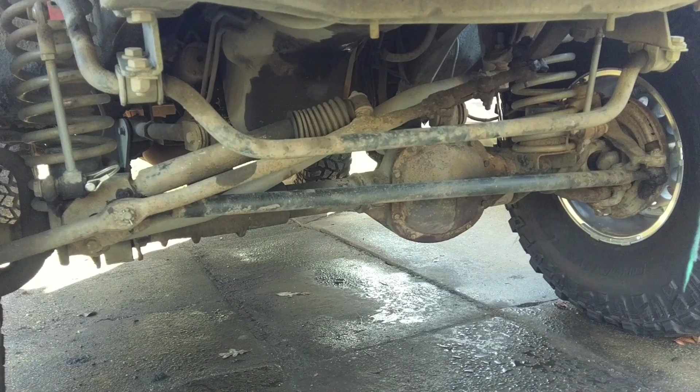So, today's topic is going to be steering. So as of right now, I got a Rough Country heavy-duty tie rod, and that's about it. Everything else is stock. And it does okay. I've been trying to grease it every month or so just to try to get the crap out of it after big trips and stuff like that. But she's still feeling a little loosey-goosey.

So, I've got some big plans for the steering, but for now, I'm going to upgrade the steering to something a little tougher. So first off, let's have ourselves a little steering lesson for heavy-duty steering and stuff like that. So real quick, we'll go over the components. Up here, this arm, this is your pitman arm that comes off your steering box, which is up there. Your steering box is connected to your steering wheel that does the left and right things.

Off the pitman arm is called your drag link. So what that does is that connects to either one of the wheels or your tie rod. So your tie rod is here. Your tie rod ties your tie rod ends together. So your drag link and your tie rod move your wheels. The way that they connect to your knuckles is what kind of steering it is.

So this steering right here is what's called, I believe, an inverted Y, or just Y steering. And what that means is our drag link goes from the pitman arm to our passenger knuckle, and then our tie rod connects to the middle of the drag link and the driver knuckle.

A lot of people, you'll see, they do a 1-ton steering upgrade. That is an inverted T setup. So what happens is the tie rod goes from the driver knuckle to the passenger knuckle. So it's one bar connecting both tires, and then your drag link connects just to the center of the tie rod. When you do this with tie rod ends, you get something called tie rod roll.

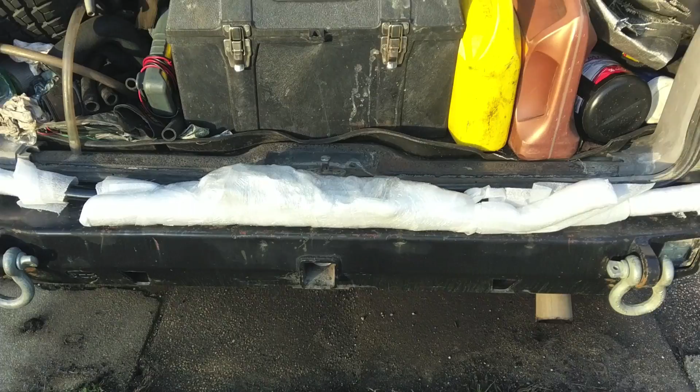Alright, so here it is. Iron Rock Off-Road over the knuckle steering kit. I went with the 1/2 inch version because I don't feel like drilling out my knuckles, because I like to have the ability to go back to old setups if need be. So this is what it comes with. You get yourself a nice beefy tie rod, nice beefy drag link, all your Heims and hardware, and some instructions.

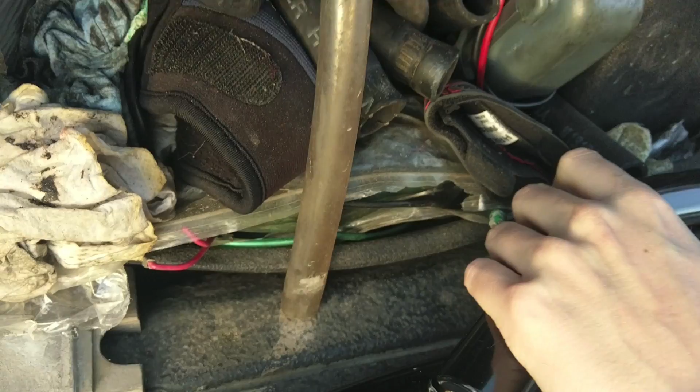All right, take a look at that beauty. So you notice we got some bends in here. I'm assuming that is to help us clear everything, so that's really cool. And the drag link's got a couple bends here and there. And these are split design, it looks like. Or at least that one is, so there must be a clamp that tightens that one down. It's probably for the adjuster. So here's our adjuster. And this will allow you to make sure that your steering wheel is straight.

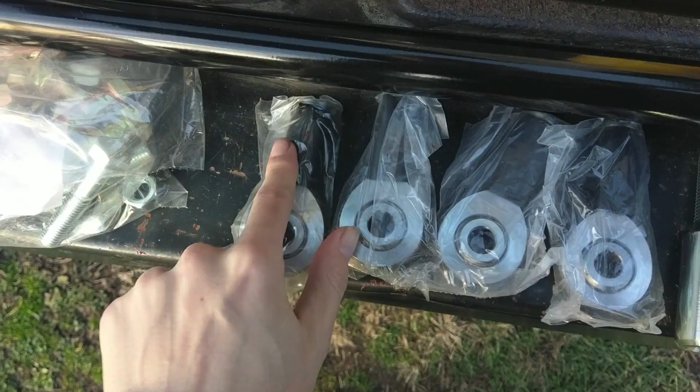We got our 4 Heim joints over here. Oh, they even got little rubber booties on there to save the threads. Nice, I like that. And a nice beefy hardware kit. And again, this is the 1/2 inch kit, so it doesn't require any modification. I think this comes with a taper insert for the knuckle, so you don't have to drill it. Like this guy right here, you push this in and it's tapered, so it makes it straight again, and then you can put your bolt through that, so it's not weeble wobbling.

With the 5/8 kit, you got to drill out all your components, and that's a pain. But if you're into strong beefy stuff, you can always do that, and I'm sure you could upgrade later. And to just give you a sneak preview, that's what it looks like. So you can see how our drag link comes up here and goes under the knuckle, so that these two angles right here follow each other perfectly.

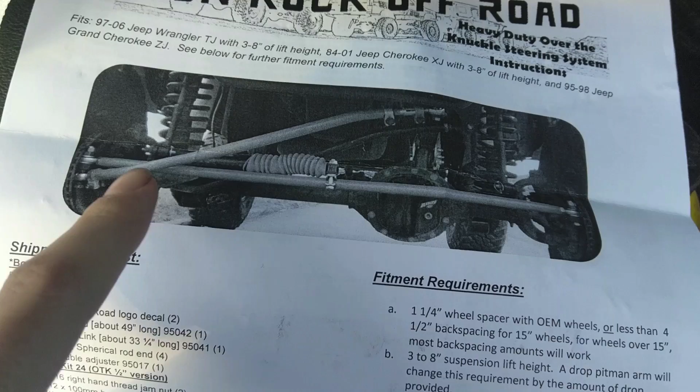And now our tie rod gets moved onto the top, so we have an over the knuckle, but we still keep all our factory steering angles in check, which is really cool. Let's jack it up, pull the tires off, and get to work.

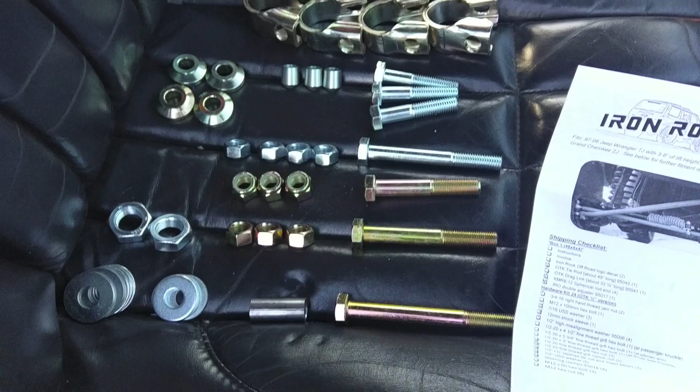Okay, so it's always a good idea just to check and see if you have all the parts. So this is what we got laid out. I don't know where everything goes yet, but we'll find out eventually. And as for fitment requirements for this guy, you're going to need at least 1 1/4 inch wheel spacers, or wheels with less than 4.5 inch back spacing. For a stock wheel, I believe it's 5.5 inch back spacing or something like that.

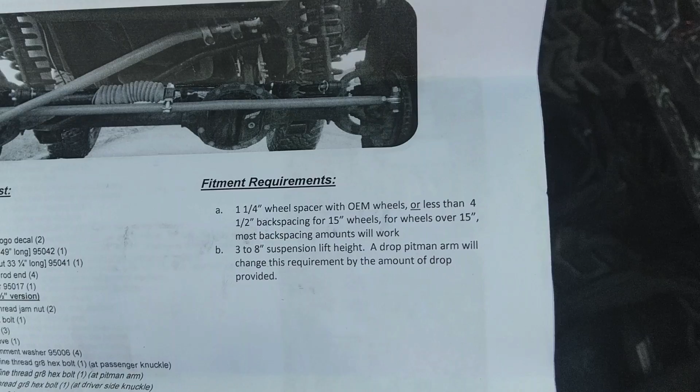So the wheels that I have are 3.75 inch back spacing, so that'll work fine. A lot of the aftermarket wheels you get will be anywhere from 4 to 3, so that'll work. And they say you need about 3 to 8 inches of suspension lift, and that's probably because the drag link's going to be a little longer.

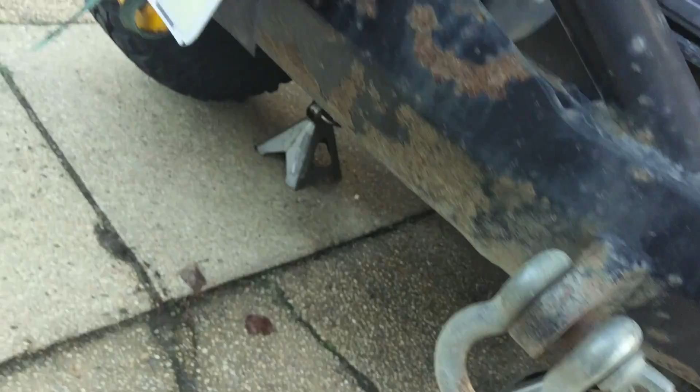Okay, make sure your axle's nice and supported on both ends, and if you're not sure about it, give it a nice shake test. Grab the truck and really move it around, make sure she doesn't go anywhere. So when you know she's on there nice and tight, you can take your tires off. If you don't have an impact gun, you're going to want to loosen up these lug nuts before you jack it up.

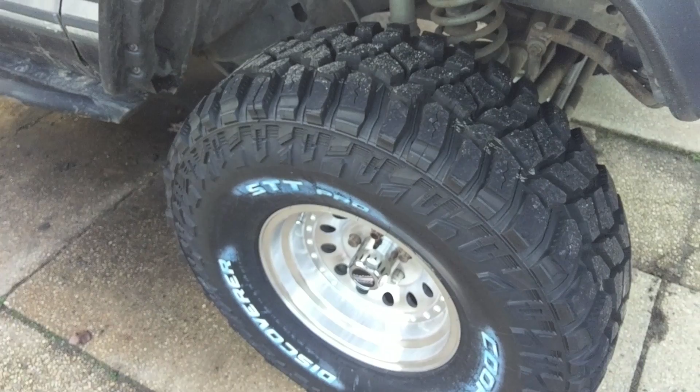So the first thing you do before you take anything apart is you're going to measure one knuckle to the other knuckle, because what you need is your toe-in adjustment here. So this measurement will be applied to your new tie rod when you put it on. So this is an important measurement. You kind of have to do this when it's all connected.

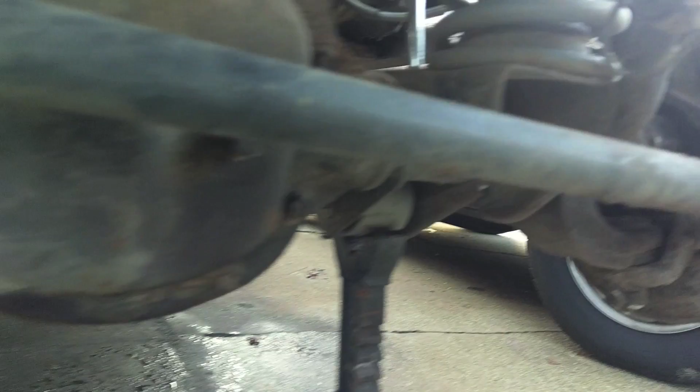So you take this measuring tape and you put it on here. You want to be on the center of the bolt. And then you'll finish over here on the center of this bolt. So you're going to take that measurement and you're going to record that for later use. Then you can start having fun. Mine was at about 52 inches and maybe a 16th or two. So I'll keep that in mind, write it down, and get to work.

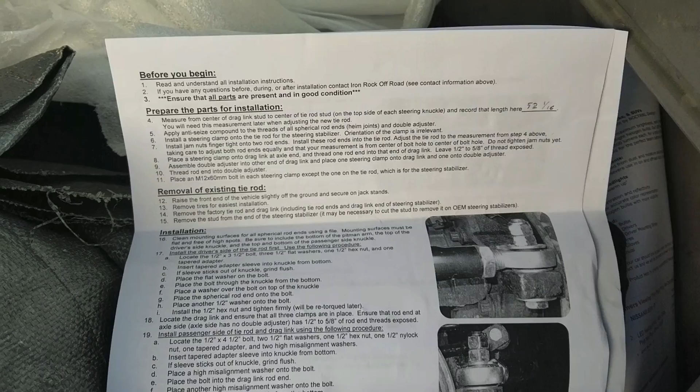Okay, so first up on the instructions is preparing everything for installation. I'm assuming that they tell you to do this first, just so you make sure you have all the parts you need, in case you didn't go over the list. Number 5, apply anti-seize compound to all the spherical rod ends, which are these Heim joints. So we're going to apply them to the threads and also to the adjuster.

One of the clamps is actually for your steering stabilizer, if you'd like to use that. So that gets installed on here, on the tie rod, which is the longer bar. Orientation is irrelevant. So for the tie rod, we're going to install some anti-seize on the threads. We're going to put our jam nut on, finger tight, and then we're going to thread this guy in. So we're going to have one on each side.

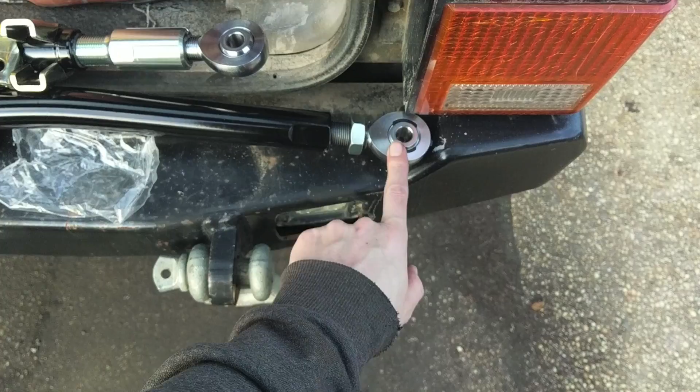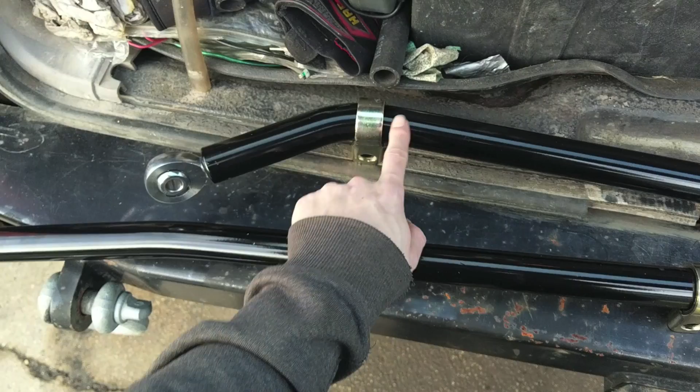So tie rod over here gets a Heim and one of the nuts. Same over here, we get a Heim and a nut. This gets one clamp in the middle for the steering stabilizer. Now onto the drag link, the part with the bigger bend is the one near the axle. So this one gets a Heim and a steering clamp.

Now the other end, that's a lot straighter, gets 2 steering clamps, the adjuster. Now this guy's a left-handed thread, so that'll throw you a curveball. Make sure lefty-tighty, righty-loosey on that one. And then a Heim into this guy. And what we're going to do is adjust this to the measurement that we took. So the center of this to the center of that is going to be the measurement we wrote down up here, which is 52 and 1/16.

So when we adjust our tie rod here, you want to make sure you do this in equal lengths. So I threaded both of these in as far as they'll go, and we'll back these out. We'll back this out one turn, back that one out one turn, and go back and forth. Since these are both right-hand threads, you cannot adjust this on the vehicle. You'll have to take one of these ends out in order to adjust it.

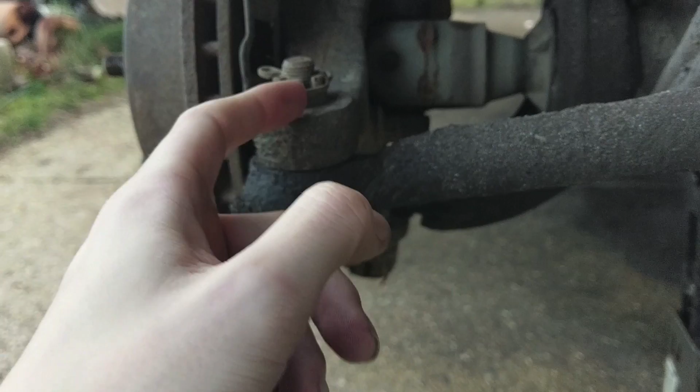So it's important to do this before it's all installed. Okay, so first off, we got to dump all the stock steering components. So it's pretty simple. We're going to remove these cotter pins. So you take yourself needle nose pliers, bend these legs out, pull it through. You can use a flathead and hammer this to pull it out. It makes it a little easier if it gets stuck.

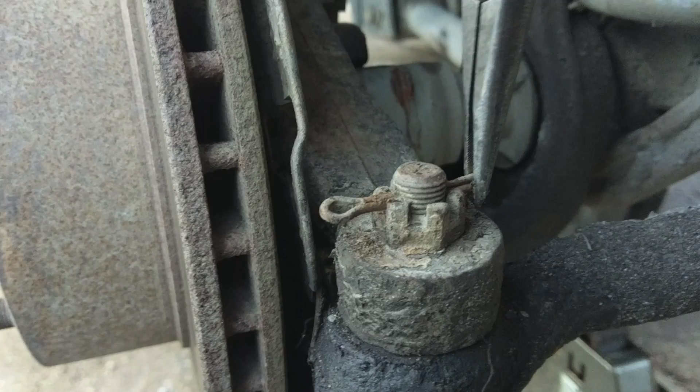I believe these are 3/4 inch nuts, castle nuts. They shouldn't be on there super tight. So we'll loosen them. Yeah, that bend is very good. Get out of there. Yeah.

So punk, tell me, are you feeling lucky?

Yeah. Alright, gotta get yourself some PB Blaster. Give her a nice spritzing. Get yourself a nice BFH. Curse words and angry faces are optional, but help. You go, who's your daddy? Hoi! Who's your daddy? Hoi! Yeah. And we can zip that off and she'll come right off. Going down. Excellent. Alright, and we'll repeat.

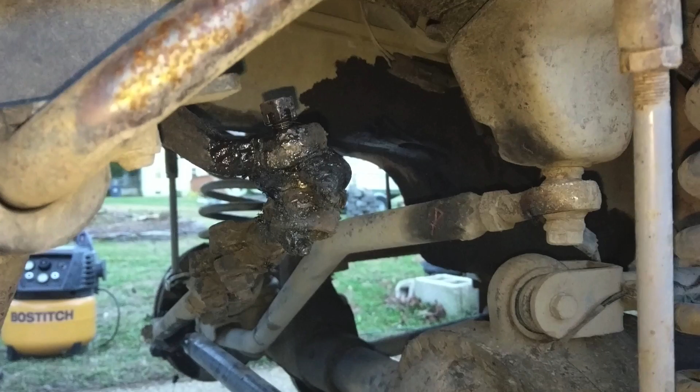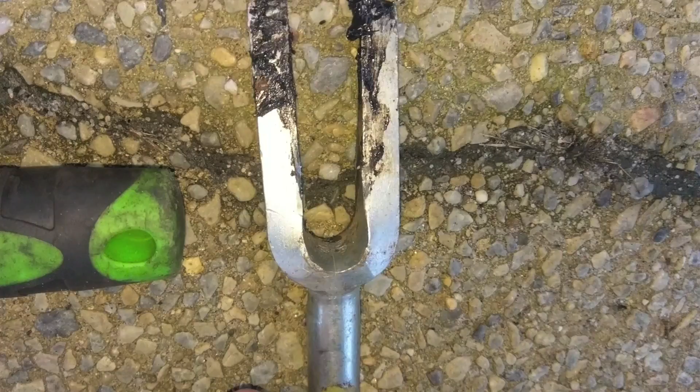Okay, so we got this one off. That one went pretty easy. This one's giving me a real pain, but I kind of figured it would. I had issues with that before. I tried hitting it on both ends with big sledges, and that didn't do anything. We tried using one of these here guys, and I actually split the thing right in half. I hammered it back together, but it's kind of useless. So I think I'm going to have to get a tie rod puller thingy.

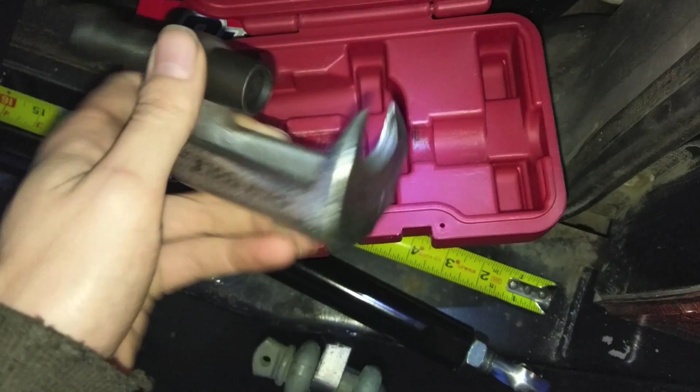Okay, so hopefully you can hear me through all this, but we got our tie rod end remover, 27-27-6. So hopefully this will help us get that pesky tie rod off. So, pretty simple little device. You just screw down and hope for the best. So I'm going to tighten this down until I can't anymore. We're going to beat the shit out of that pitman arm, and hopefully she'll get free.

So this is how it gets set up. A little clampy at the bottom, pushy thing on the tie rod, and we tighten it with a 3/4 inch nut socket. So now we tighten that down. Although you might want to put an impact on here, it's usually not the best idea. It's better to do it by hand because these things are fragile and they're gonna break. So hopefully this tool doesn't explode in my face. May get some glasses just in case, but you just keep tightening it and hope that eventually this thing puts enough force on there to pop the goddamn thing free.

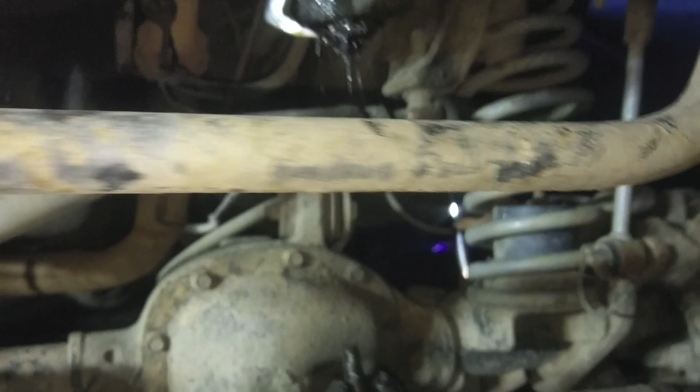Okay, so I tightened it down and I actually gave this part a little wiggle down here and she finally broke free. So she was in there good. Stubborn little thing. Cool. Only thing left is the steering stabilizer bar now, and those can also be rather annoying.

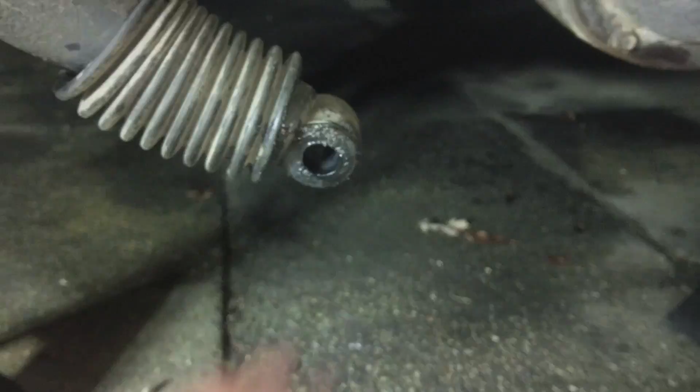Okay, so I took off the nut from this side because I'm pretty sure they come with a bolt that replaces that whole everything. So that was an 11/16. So I took that off. There was a washer on mine, and a nut. The washer is what was holding it on. So once the washer popped free, it came off pretty easy. So now you can take the nuts out of everything else, and she's all free. So you can move that junk on out of there, and we can work on the fun stuff.

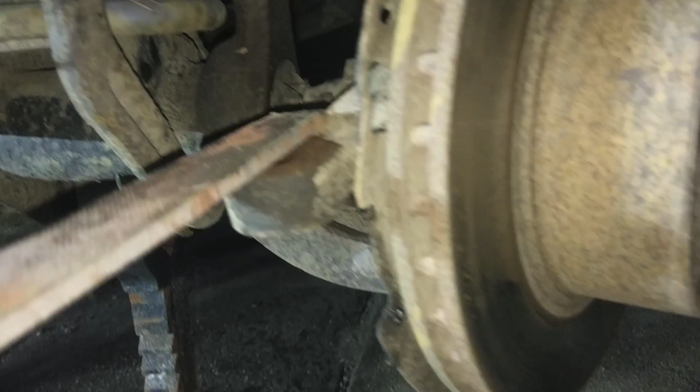Sweet. Number 16 says to clean mounting surfaces of all spherical rod ends using a file. Mounting surfaces must be flat and free of high spots. So I took myself a flat file, and I did just that. So you can use a smaller one like that. I use this bigger guy over here. And what you're doing is just making sure there's nothing out of the ordinary on here. So just check her out real quick. Make sure there's nothing high or bad. It's all flat and purty. And then you're good to go.

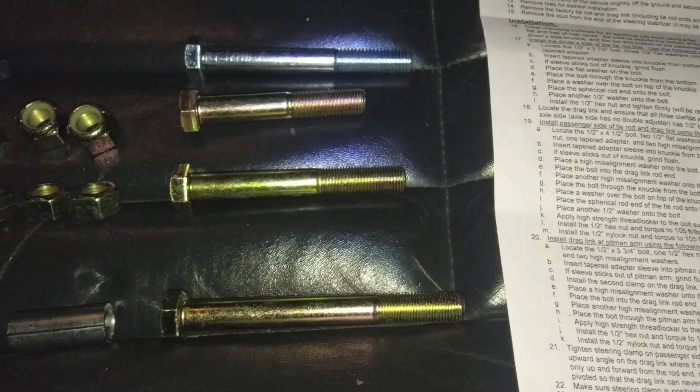Out of our, what are these, zinc-plated bolts, I guess? Whatever the shiny golden-looking ones are. We got a 3 1/2, a 3 3/4, and a 4 1/2. So this guy we're going to install first. It says for number 17, we're going to install the driver's side of the tie rod first. So we want one of these guys. And we want three 1/2-inch washers, which I believe are the bigger ones.

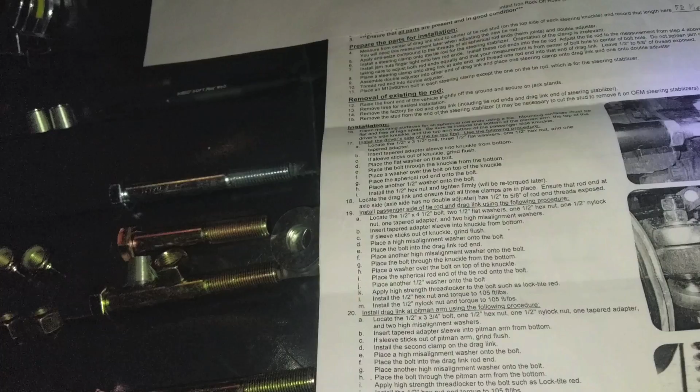And 1 1/2-inch hex nut, and 1 tapered adapter. So we want an adapter, and we got a hex nut, like so. Okay, so the first thing we do is we take this tapered adapter, and we put it in through the bottom, since that's how it came from the factory. And you push it on in there as far as it goes. They said if it sticks out of the top, then you have to grind it flat.

So what we're going to do is we're going to try and get a punch or something, and see if we can hammer that in as far as it can go, because that's what makes this work and all that good stuff. So I got myself a little punch and hammer, and we give it the old tappy tap tap from the bottom. So now it's up there a little bit. So she is firmly seated. Excellent. Let us continue.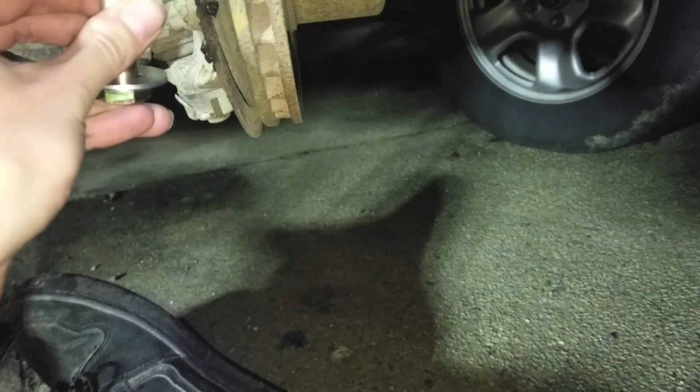Alright, this might be a little tricky. Washer on das bolt. Bolt into here. Plus bolt. Bolt into hole. No? Oh boy. Okay, well that's cool. I guess when I hammered that tapered adapter up into there, I don't know if it shrunk a little bit or what, but I just had to tap it a little bit with a hammer, and it sits in place pretty well now, so that's cool. Makes this job a lot easier.

So now we take das second washer, and we take das Heim joint. Okay, like so, very nice. And then we take a third washer, like so, and the nut. And this is a regular nut, not the lock nut with the nylon insert. Alright, cool. And there we have it. The driver's side is done.

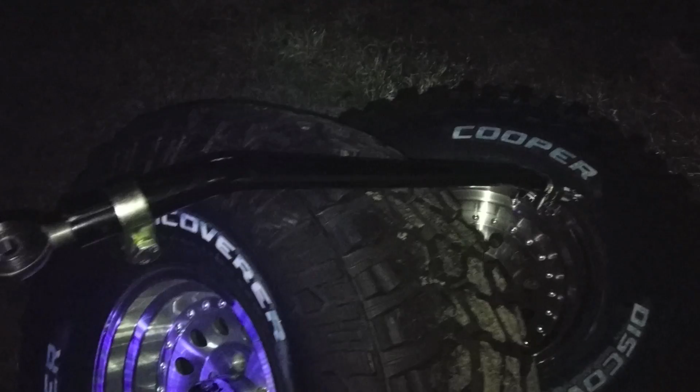So now we have to come over to the drag link over here. The side that does not have the double end adjuster, which is going to go on the axle. They say the threads need to stick out anywhere from 1/2 inch to 5/8. So we come in here, like so. And you'll notice we are around the 5/8 mark. So maybe I'll screw it in a turn or two, but that's about all you need sticking out of there. There you go, that looks pretty good. So this guy's going to go on the bottom, and then the other side of the tie rod is going to go on the top.

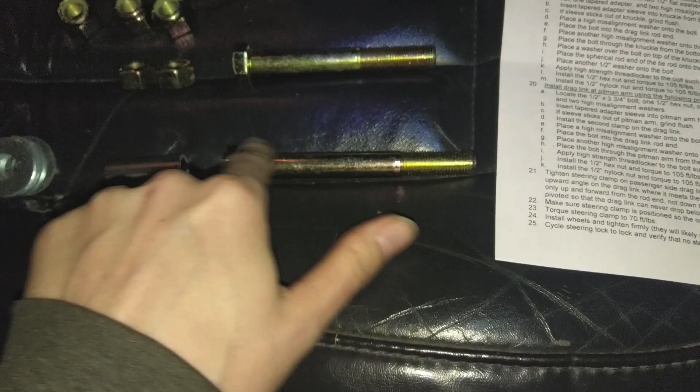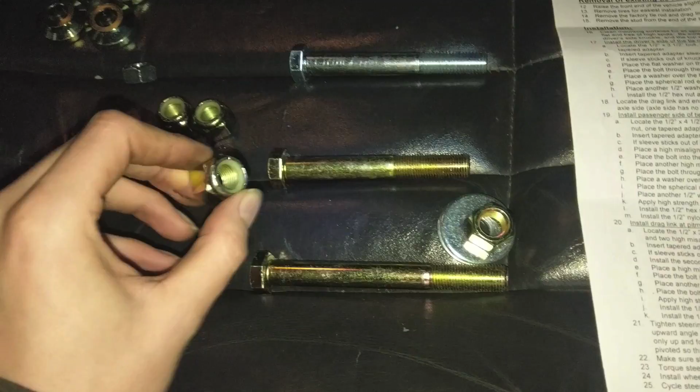Okay, so now we're going to want the biggest bolt, the 1/2 inch by 4 1/2-inch bolt. We're going to need 2 of those 1/2 inch washers, 1 1/2 inch hex, and one of these 1/2 inch locking nuts. We're going to need one of these tapered adapters, and we're going to want 2 of our misalignment spacers. Sweet. Okay, so first up, I'm going to knock this guy into place. Okay, she doesn't stick out the top, so we can move on. So this guy is going to go at the bottom, and this guy is going to go at the top.

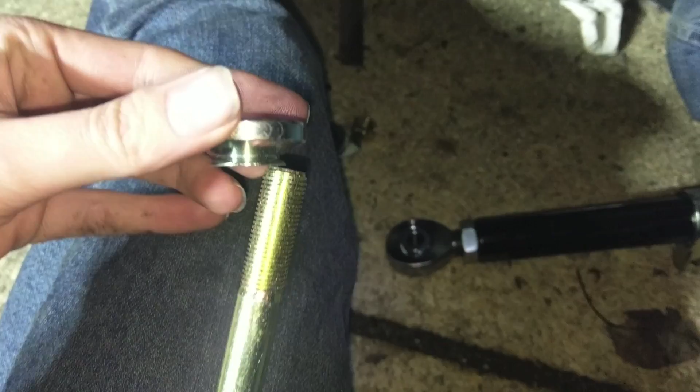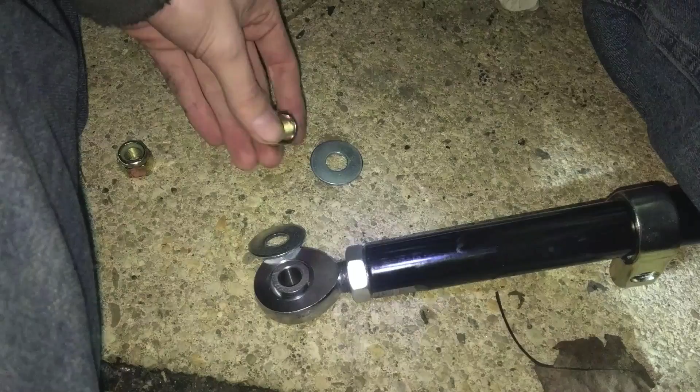So we have a bolt, high misalignment spacer. We're going to slide that through the rod end like so. Then we're going to take our next high misalignment spacer, make sure it goes on the opposite way so that it actually functions. Then we're going to take this assembly, put it through the knuckle, and after the knuckle, same as the other side, we're going to have a washer, then this end, then another washer, then a regular nut. Now they're saying to apply some high-strength thread locker, like the red stuff, and that gets tightened to 105 foot-pounds. So when you're all said and done, it should look a little something like this.

Okay, so the way that I found is this tie rod has a bend in it, so make sure that the bend is fully facing out, because that's what's going to give you your clearance. And instead of pushing this bolt all the way through, you get this on there, you have the bolt down at the bottom, and you slide the bolt up, because this isn't going to be able to go up and around with this guy in the way. So now that that's good, we can tighten that down. We'll add our thread locker, and we'll give her the torque spec.

Okay, so I don't have red on hand, but I do have some blue, so that should be better than nothing. So we're going to apply it up here, and we're going to tighten that down to 105 foot-pounds. I got one of these guys. I prefer the dial a little bit more, because you can calibrate them on the fly, so you know that they're accurate.

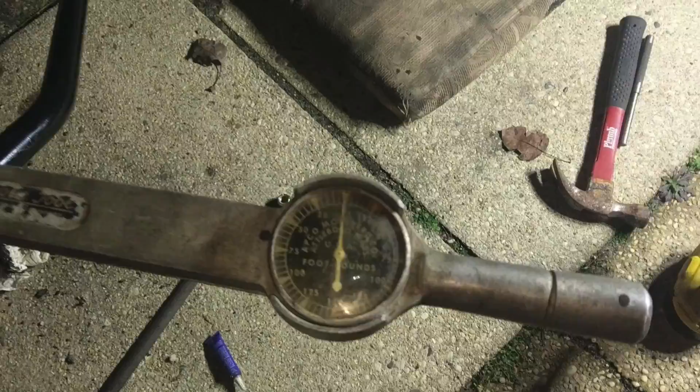Alright, let's crank it down. Use yourself a 3/4 inch something or other to hold the bottom bolt so she don't spin, and then torque the top. So we are all the way up to 105. Very good. We got our blue Loctite on. Happy dappy do.

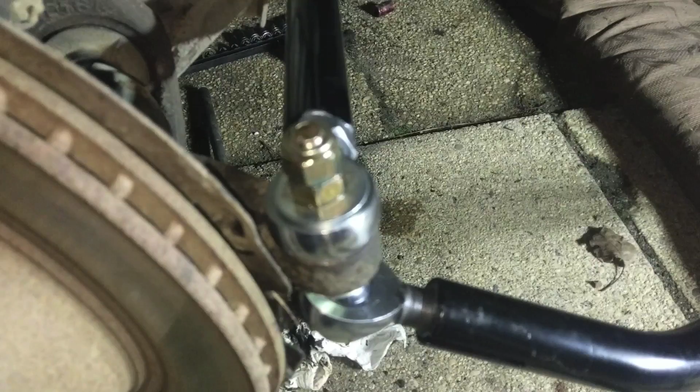Okay, don't forget your lock nut as well. That one also gets 105 foot-pounds. So when you're tightening it, make sure that your socket only sits on the top one, not the bottom one too. That way you're tightening the right one. And again, you're going to have to hold the bottom so it doesn't spin. So now she's locked in there pretty good.

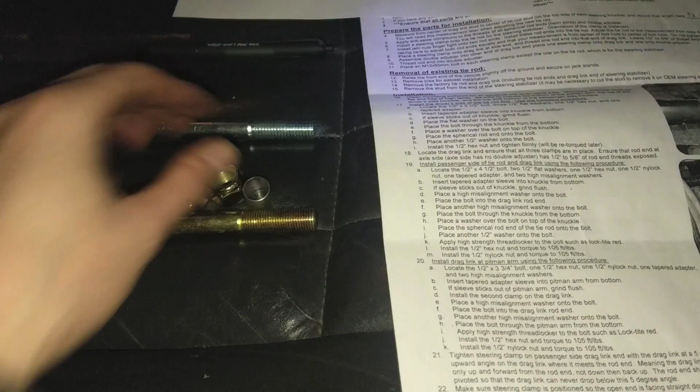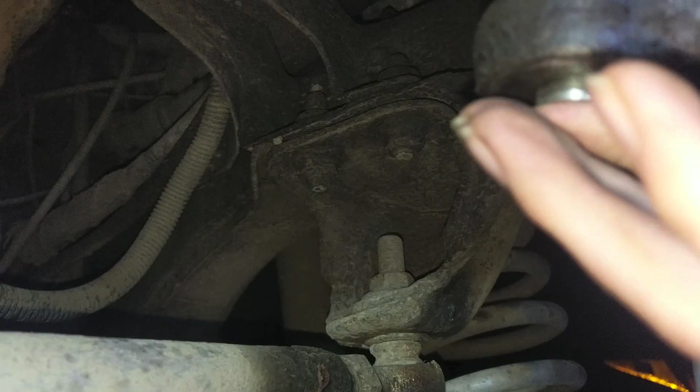Sweet. Next up is going to be the drag link to pitman arm connection. So we're going to pick our last bolt right here, our 1/2 inch by 3 3/4. 1/2 inch hex nut. We're going to need one lock nut, one tapered adapter, and 2 high misalignment spacers. Again, take our little adapter and put it in there from the bottom. Hammer it up in there. Doesn't stick out the top, so we're good there.

So now we can take our bolt with a misalignment spacer on like so. We'll slide that through our rod end. Put another misalignment spacer on there. We'll put that whole assembly through to the top. And it's a little weird, it doesn't mention a washer on this connection. They just say the nut and the lock nut. I don't know, it seems a little weird.

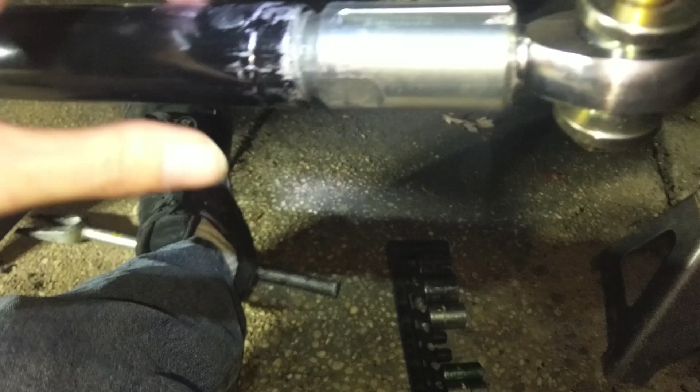Alright, so they don't mention this in the instructions, but I'm going to assume it's kind of important that this double adjuster is also kind of equal the way that the tie rod ends have to be. So I got this one threaded in all the way. Remember, that's righty-tighty. And I got this one threaded in all the way. Remember, this one's lefty-tighty. So now when we loosen it, it will extend or contract instead of just going one way or the other because of the different threads. So now I guess I'll put that in there.

Okay, this one will get the same treatment as the other. Blue Loctite and 105 foot-pounds on both nuts. So make sure you really get her in there. Hold on the top never hurt nobody. Okay, so once you're all done, it should look something like that. Misalignment, misalignment, nut, nut. And we got some thread locker on there. 105 foot-pounds for both of them. A little tricky getting in there, but it's possible.

Okay, so now that the whole system is actually installed, we can mess around with it. So the next thing says that this drag link has to be tightened down so that it sits at a 5-degree angle facing upwards. So it's hard to get you level here. 5 degrees ain't much. And I would assume that it might even be a little bit more than this, but the way that I figured it out is that this can move up and down, and I just made sure that when it goes down and when it goes up, it just doesn't touch there.

So it could still move up a little bit, because I think it's spun a bit. There we go. So that way when it sits down, it's like that. So as long as they don't contact, I figure everything's okay. So this one sits all the way down, and up here, that one will have to sit all the way down too. So we can spin that with our adjustable wrench, and then we'll tighten down the clamps to 70 foot-pounds.

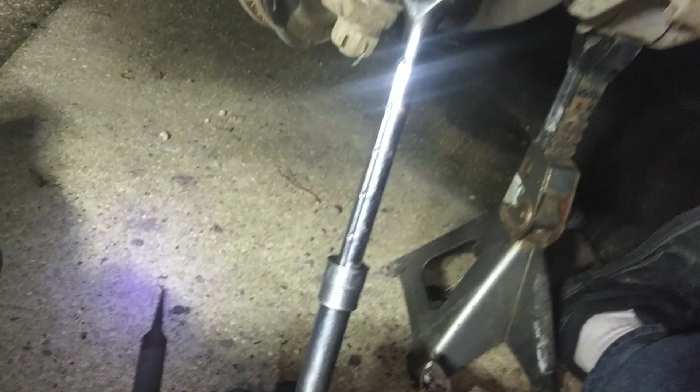So what I did is I held this back one up like here, so that way it stays up and I know it's not going any lower. But it took quite a few rotations to finally get that up to 70. So now we're looking good.

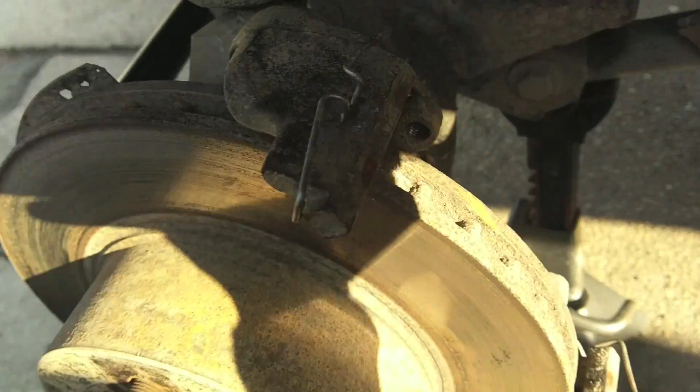And we're back with day 2. So I decided I'm going to do my brakes real quick because I knew when I did the tires I'd need them. What do you think?

A little low, eh? At least they weren't down to the metal. Still had like a 1/16 of an inch, probably another couple weeks, right? So yeah, I'll throw them on. We'll get back to putting the wheels on and adjusting. That's why dirt and mud sucks so much.

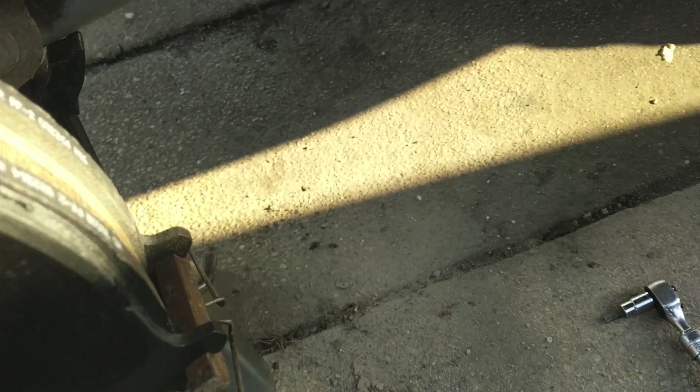It gums up everything. So what you want to do is take a file and sand all these flat parts right here. This one, and this one. So that way your pads move smoothly. Because if they don't float on here, they're going to get stuck and worn out real quick. So make sure you just hit them up with a file real quick, like a flat file like one of these guys. Then they might actually last more than a freaking week.

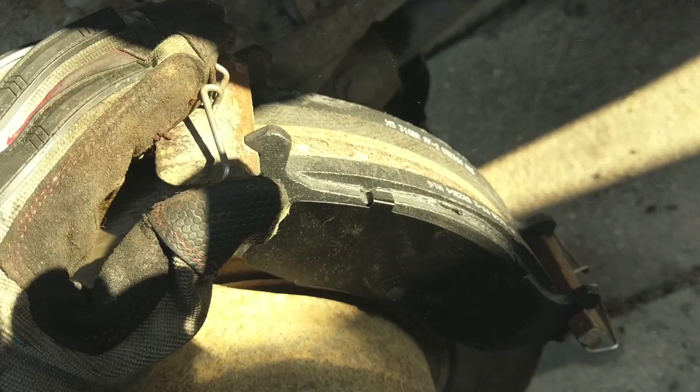And now back to your regularly scheduled program. So we gotta put the tires on. They don't have to be torqued to spec, but make sure the lug nuts are at least tight. And then we're gonna check toe in. All right, ain't that pretty? Okay, so next step is to turn the wheel. Just make sure nothing's binding up. It's buttery smooth. There's not a lot of wiggle either. Like she's tight. I like that.

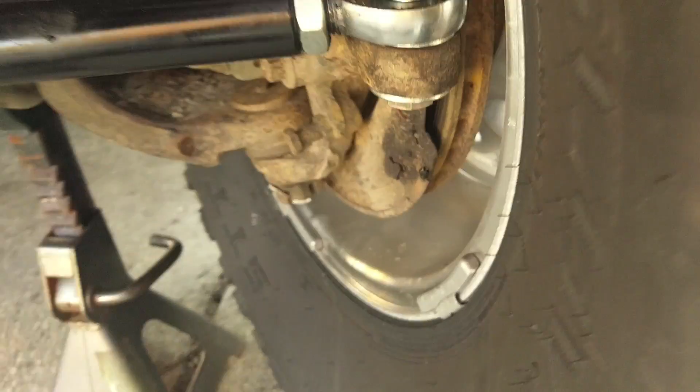Okay, so this is full lock the one way. So come in here, no rim clearance issues. No clearance issues there. Coming over here, that's looking good. Nice, nice. No touching, no rubbing, no clunking, no nothing. Cool. Alright.

Oh my god, it's amazing. There's no, like, any kind of free wiggle room at all. It's just tight and beautiful. Wow. These Heims are dreamy. Holy. Not bad. Alright, cool. And for diff cover clearance, I don't know if you can see that. I can't really. We got a solid amount of fucking distance there, though. Talking 2 fingers worth at least. That's a full lock.

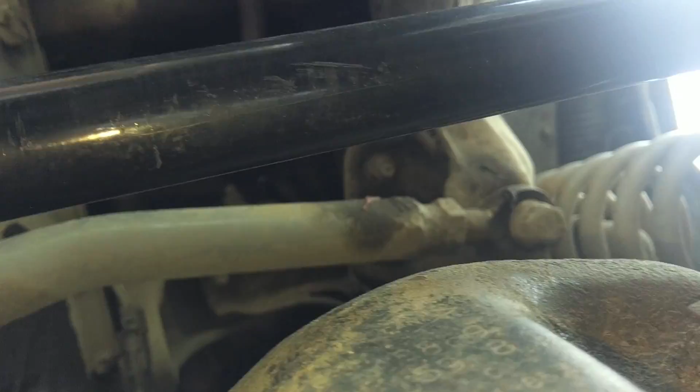So, the way that they recommend you do this in the instructions is you pick 2 points on your tire, like one on each side. So make a little dot. And a little dot. Make sure they're facing all the way forward like that. And what you're going to do is measure from this dot to that dot and record that reading. And then you're going to turn the tires 180 and measure from that dot and that dot again, but on the back side. And what that does is make sure that you have a proper reading that's accurate.

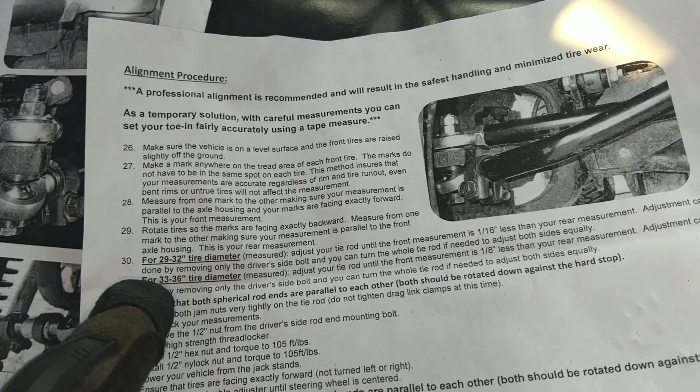There's no worry about tire wear issues and run out issues and all that stuff throwing the reading off, because this is going to be a close reading. For small tires you need a 1/16 of an inch in the front, and for big tires you need 1/8 of an inch in the front. If we come out over here, professional alignment, 29 to 32 is 1/16 inch less, and 33 to 36 is 1/8 less. So that's all we do.

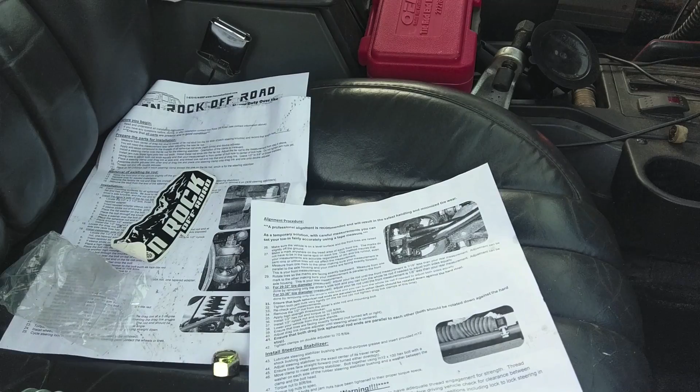So we'll take our readings and see what we get. And if our reading needs an adjustment, we take off the driver's side. That's why we didn't torque that one down yet. And we'll turn it out and see what we get. Okay, measuring on the front and the rear. The front was 50.5 inches, and the rear was 51 3/4. So that's way off. We have way too much toe in, so we're going to adjust that a bit and see if we can't get something a little more reasonable.

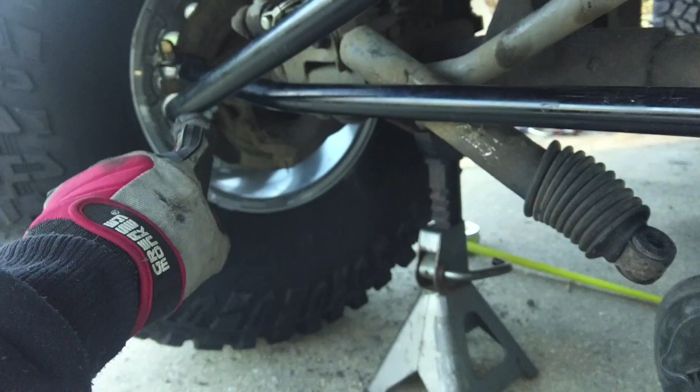Okay, so get yourself one of these here gear wrenches, 3/4 inch. That way you can slip it in there and do the work you need. Now, you won't be able to pick this bar up and get it out of the way of this thing, what you have to do instead is let the bolt drop down, and then you can pull it out. And again, same way, you got to push the bolt up just a little bit, and then put this on, and then slide it up and tighten it. So I spun that one out a full revolution, and I spun this one out a whole revolution. Half turn, whole turn. Try again.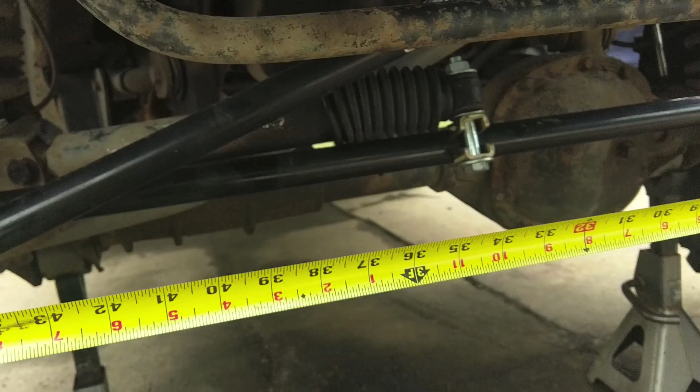We'll take 2 measurements again and see how close we are now. But instead of measuring from the sidewall, I'm going to measure from the lug, where it's nice and flat, and it's flat all the way across. There's no bend, because when I had the bend out of the tape measure, it was just a pain in the ass. So now measuring from this corner all the way to this corner right here. Okay, so this is a little hard to do one-handed, but onto the lug, straight across to this lug, and we're looking at about 59 and 1/16.

And on the back side, we're 59 and 3/16, so that's a perfect 1/8 toe-in difference. And all I had to do was adjust it a half turn. So it may be a little different on yours, but for mine, every half turn is an 1/8 of an inch difference, or at least from that. So that's all it was. It was only off by half a turn, but I guess that'll be enough.

Okay, so next part is we can finally tighten down this nut once and for all. So we're going to back this off a little bit, get some of that Loctite in there, torque this bad boy to 105 foot-pounds, then we'll put the other nut on there, and another 105. Now I loosened up the lug nuts enough to push the wheel out of the way so I could get down to this. You may have to take the tire off.

Alright, so now, if you got them, whip them out, get your 12-incher, 14-incher, 18-incher, whatever you're packing, and tighten up these tie rod nuts. You want them super tight, so as tight as you can get them. So they tell you to make sure that they're both rotated down, they're both facing the same direction. So that one is down, and that one is down.

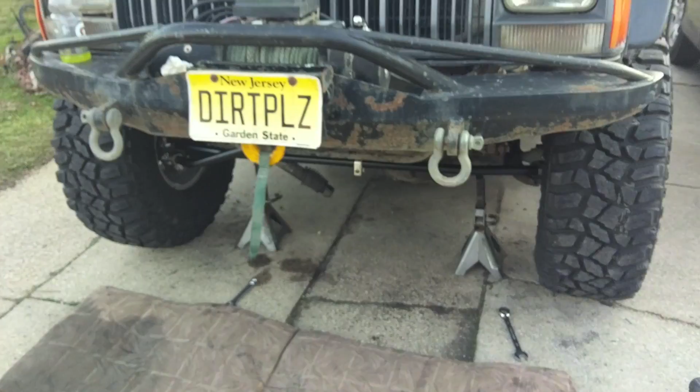And that's going to be the same for the drag link, so you notice this one's down, and that one's not fully down yet. But that's because we still got to do the adjuster. But we can turn this with a wrench, just rotate it down. So I think at this point we take it off the jacks, put it on the ground, straighten out the steering wheel. Next, what you want to do is make sure that your tires are pointing straight ahead, about as straight as you can get them. You'll probably have to drive it on the road and then adjust it again. Looks like my tires need to go a little bit to the left.

Okay, so now what we're going to do is adjust the double adjuster so our steering wheel points straight, because if you notice, that ain't even close to straight. Now you want to make sure that you're doing the least amount of work possible, so obviously you want it to rotate counterclockwise, not go a full loop clockwise, because if you do that you'll lose a lot of steering or something will fall off. So what we're going to do is change that adjuster and rotate it until this wheel is straight. We're going to come down here and adjust this whichever way is necessary. We'll spin it and then see when we're good.

Okay, so there we go. Tires are straight and the wheel is straight. Yay! And then once I drive it, I'm sure I'll find it'll be off a little bit here or there, and then we'll come in and readjust. So for me, since I tightened both these down all the way, so that way I knew that they both had as much thread engagement as possible, I had to take the wrench and push it up like this. So that would be a clockwise motion to do what I had to do.

Last part's a steering stabilizer, so they tell you to put it in the middle of the travel and have your wheels in the middle, and then you can put everything through and tighten it up. So I guess you'd have to extend it all the way that you can, measure it, push it in all the way, measure it, and then go in the middle. And what they say is you get this in the center, and then you move this guy to meet up with it. So this little shock sleeve thing is going to go through there. Might need some grease to push it in. Got a washer on either end of this, and then one on top with the bolt, and you're good. It'll look something like this.

I don't know if it matters whether the nut goes on the top or the bottom, but you know, sandwich washers on every part, and it gets torqued to 80 foot-pounds when it's in the center. Now I'm going to leave this loose because I just want to drive it around and see what it feels like without this stabilizer. Because when you have good steering, you don't really need one. I'm going to drive it around, make sure the steering wheel's straight and all that good stuff. Let's see how it is.

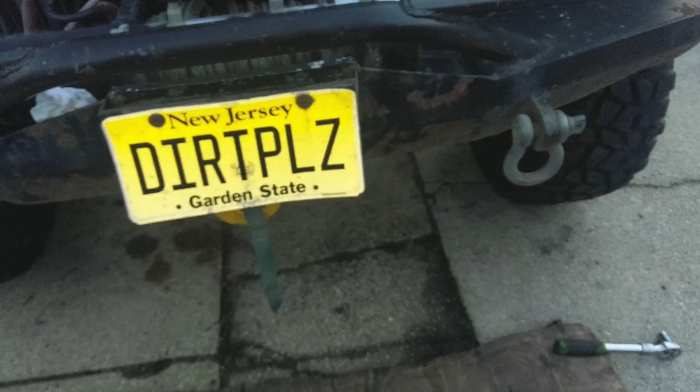Alright, on the road. Make sure those brakes still work. Pump them up a little bit. Squeaky. Oh my god. There's like very little dead zone, if anything. Like, this is amazing. That's nice. Oh, that's buttery. That is buttery. Wow. That's nice. Let's try some high speed. I wish I could find some bumps around to see if it pulls the steering at all when you hit them.

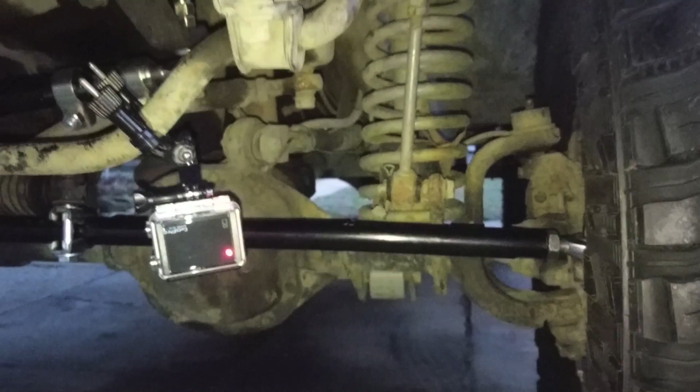Oh. Pretty firm though. If I turn the wheel, it moves. I like it. Wow. All I can say is wow. That's nice. Very tight and responsive. No dead spots. No bump steer. None of that crap. No clunking. She's a right nice beauty, mate. I like it. I like it a lot. Now I can't wait to actually try it on some real stuff.

And yeah, even without the stabilizer, it didn't really seem like it was pulling me in any direction or bouncing around too much. But I'll probably still measure that out and mount it properly anyway. Okay, so don't forget step number 50. Make sure to install a sticker. Nice. Guess the off-road part's a little low, but oh well.

Okay, well, I gotta say, I'm impressed. I really like this kit. I saw it online, and I like the steering angle design. You get over the knuckle, and you still keep your proper lines, which is awesome. That's very important for good steering. It's Heims, so I'm wondering how well it's gonna hold up in the mud for the next couple years, but I like this. This is beef. I'm super happy with this. I really am. Steering's nice and tight and firm, and it's responsive, and I don't hear any noises.

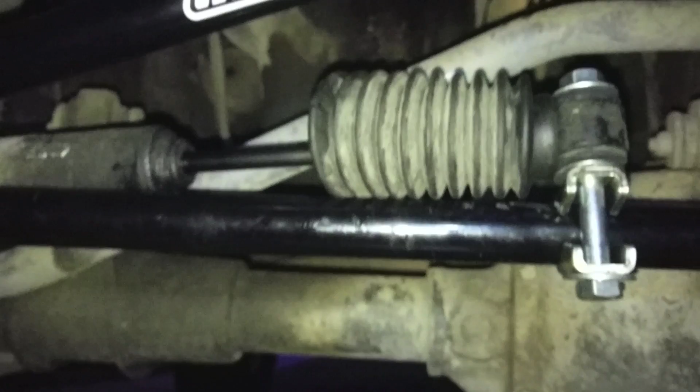That's cool. Okay. So this guy has 8.5 inches of travel. So right now the steering is centered, so we're gonna measure that to 4.25 inches, and then we can tighten it down, and it should be good to go. All right, that bolt gets 80 foot-pounds, so that's at the 4.25-inch mark right there. I think that just about does it.

So I noticed my stabilizer was leaking some kind of liquid. I thought it was just like mud or water or something that was stuck in the rubber, but that looks like oil to me. So I'm thinking this is actually getting compressed all the way because I can't turn it as hard passenger as I could driver. So I don't think this is adjusted properly. So we're going to loosen this up and see if that doesn't fix our drippy problem.

So to properly adjust this thing and make sure that you don't completely destroy it, make sure to turn the tires all the way left and then move this in almost as far as you can and kind of tighten it just enough to hold on. Then push it all the way the other direction and see if it's overextended or underextended. Or overextend it and then bring it in a little bit, you know. Just make sure that it's connected and you go full lock to lock and make sure you're not squishing this. Because if you squish it, you're going to mess up your seals, your oil's going to leak out, and it's not going to do anything anyway. So make sure to do that.

Alright, so one other thing that they don't mention in the instructions, but is something generally nice to do once you're done steering, is check your lock to lock and adjust your knuckle stop adjusters. That way, they actually do their job so that your tires don't eat up your control arms. So the knuckle adjuster is this little guy down here, that little bolt, and its job is to hit the knuckle before the tire does something it shouldn't. So what we're going to do is go lock to lock and check how close the tires are and adjust them so that they stop.

You'd think, oh, well, why would I want to do that? It would limit my steering, but it's really nice to not eat up your tires all the time. Cut her all the way driver. Now for me, I should probably set my steering stops because the tires like to eat up those lower control arms quite a bit. Nice little rub-a-dub there. But that has nothing to do with steering.

Well, after breaking that knuckle stop, I found out that that is what was stopping it. So that's a bitch. I was getting it to move for quite a while, but then when I tried to tighten it in, it finally just gave way. Oh well. So that's what it looks like when it's not broken.

This stubborn little bastard. I ended up trying to back the nut out, but there's actually a weld on the bolt for some reason, so you can't back it out all the way. I was going to do the double nut method, but that didn't work. It just stripped the nut and it started spinning.

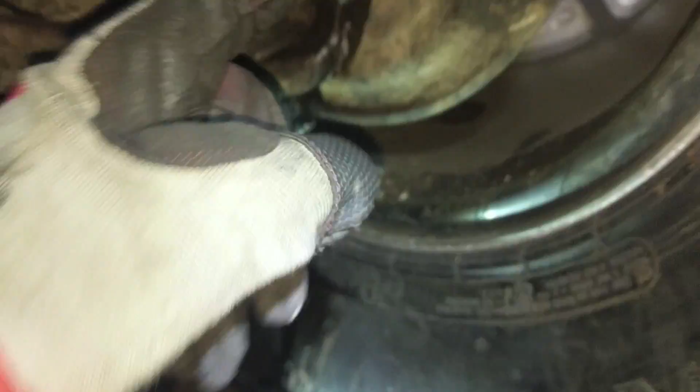So I welded the nut onto the bolt real good, and then I took a chisel, and you got to have a sledge. You got to have a really good fucking whack. But you start hitting straight in there to dig, and then you start going at an angle and trying to turn it, and hopefully eventually you'll get that thing turning. So she's moving now. It ain't easy.

So now I'm just using some vice grips to get a good grip on them. And then once it catches, you fucker, she'll move. So, alright, once we get that out, I think I'll replace it. And then we'll adjust it so our tires don't rub our control arms anymore. Alright, got the little bastard out.

Fucker. Okay, so they had two sizes. One was 1.25 inches, one was 1.5 inches. And I know every time I buy one, it's usually the other size. So if you buy two, then the first one you buy is usually right. So 1.25 inches is good. This one was probably a thread or two longer than 1.25 inches, but it's good enough.

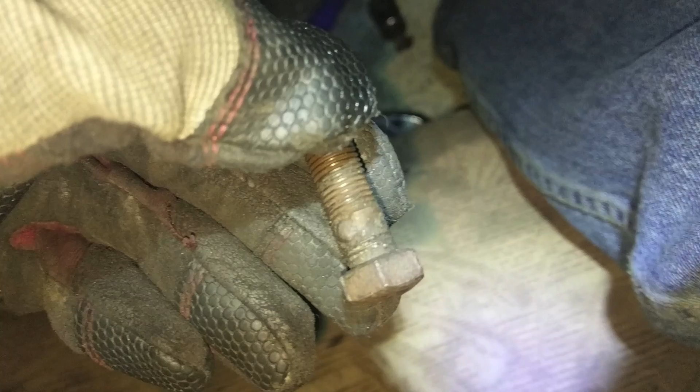The only difference I notice is, besides that little weld mark right there, the head is kind of rounded. I don't know if that was a factory thing or if the corners just got smushed in, but it looks pretty evenly rounded. I don't know. But anyway, so we got a nut, and we got that threaded all the way in there.

So what you do is you turn her all the way to lock, and for us, we're trying to make sure that it doesn't hit that control arm over there. And then we'll tighten that. Well, I guess we back this out so that it contacts that knuckle, and then it should be good. Then we just tighten down our little lock nut.

So basically, you just come in here, and you keep loosening until they kiss. And then once you notice that the tire starts to move out a little bit, then you can tighten down your lock nut. And then when you're done, it'll look like this. So when you turn all the way, your tire shouldn't touch. And that's what you're looking for.

So that's how you adjust your axle stops, if you didn't know what those were. And those are 3/8-24 thread, and they're 1.25 inches long if you're trying to find the stuff for that. I made sure to get grade 8 so that they won't fall apart or break anytime soon.

Sweet. Okay, so I know it's dark and you can't see much, but oh my god, finally got to take it on a little bit of a longer drive, and it's amazing. It really is. So it handles. That's the thing. Before, the steering was kind of loose, so when you tried doing corners or squeezing through tight spots, you were a little worried. I was rigging the wheel back and forth the whole time, trying to make sure it stays straight, and it doesn't make you feel confident when you're not sure if the truck's going to go the direction you want it to.

But with this, it is so tight. There's not even a second thought. You just turn the wheel, it goes where you want to. It feels really safe to drive now too. Like, oh my god, yes, this is good. I'm very impressed. I am super happy I snagged that deal on Black Friday.

This is gorgeous. So, Iron Rock Off-Road, you guys are doing something right. Nicely done. Alright, well, hope that helps you make your decision on some steering. Keep you going in the right direction and stuff, okay?